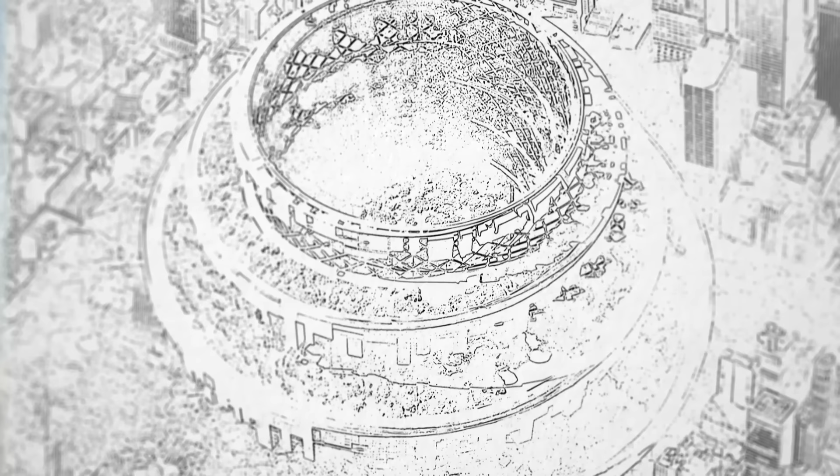Max Vitale, an architect from Berlin, has numerous visions of what the city of the future could look like. His designs have names like Babeltown. Instead of showing individual buildings, they show entire neighborhoods, parts of a city that appear lifted straight from the set of a science fiction movie.

That's how futuristic his designs seem to be. They ask what the city of the future might look like if we dispensed of conventional forms of mobility, like the car and the traditional elevator.

Some of these are provocative images that may look utopian at first glance, but there's nothing utopian about them. Babeltown was simply the idea of how the linear movement of a tram or a train could be turned into a spiral. The same goes for the village.

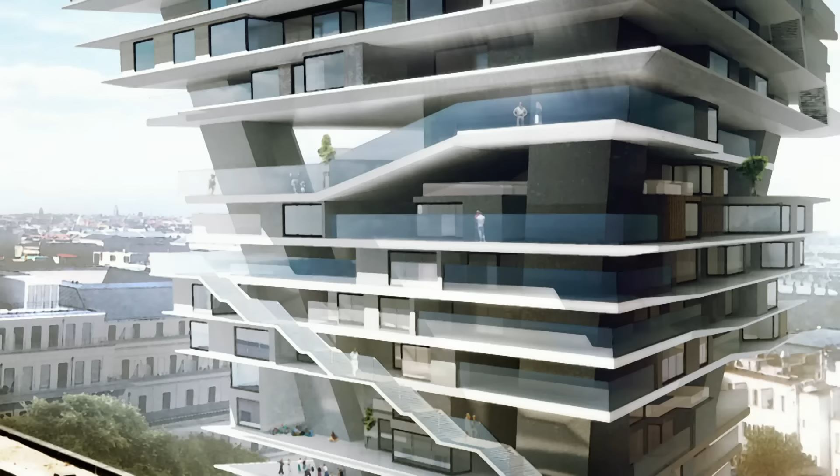The idea was to see what happens when we have a diagonal elevator, a zigzag movement. We wanted to show how the movement through the space is always the inspiration for the space itself, just as it is flat in a car city and vertical in an elevator city. That's exactly the same, only other mobility technologies serve as the input and inspiration for the design.

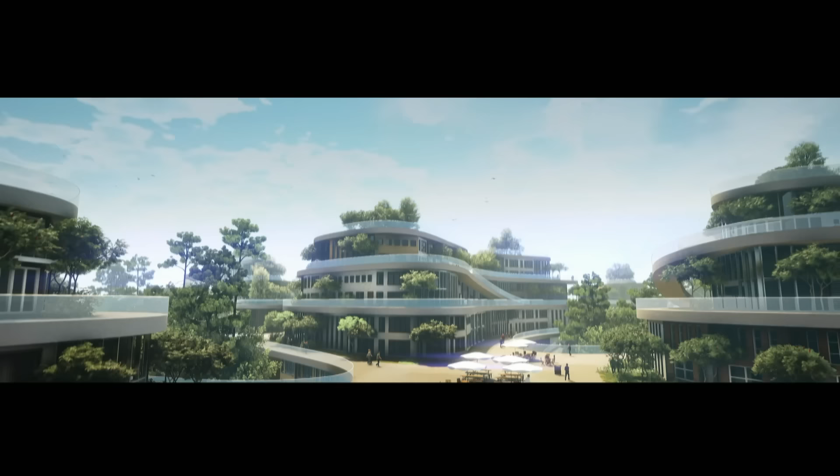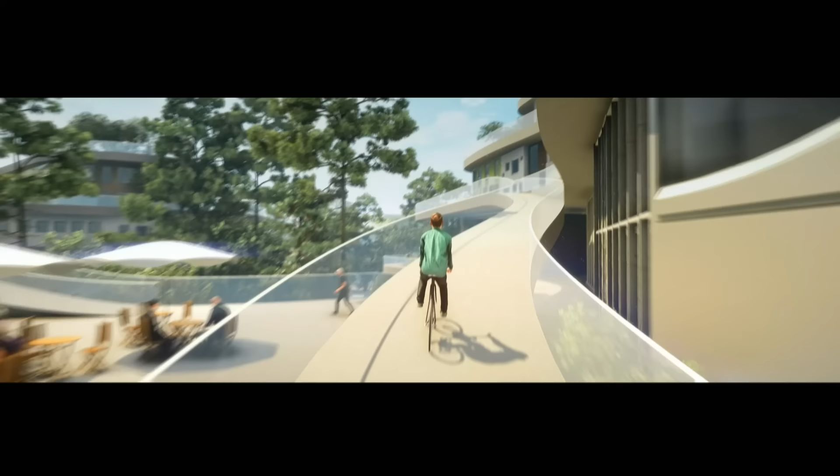Vitale's current concept was also based on this principle. He calls it the urban shelf. A neighborhood complex in which there are no cars taking up valuable space, but where people move from place to place with the help of so-called micro-mobility solutions, which are extremely flexible.

Instead of thinking in terms of finished architecture, we're focusing on the infrastructure that makes living together in a neighborhood possible in the first place. This starts with the basic structure and includes the floor, the ceiling, and the load-bearing structures, and the necessary infrastructure for water and electricity.

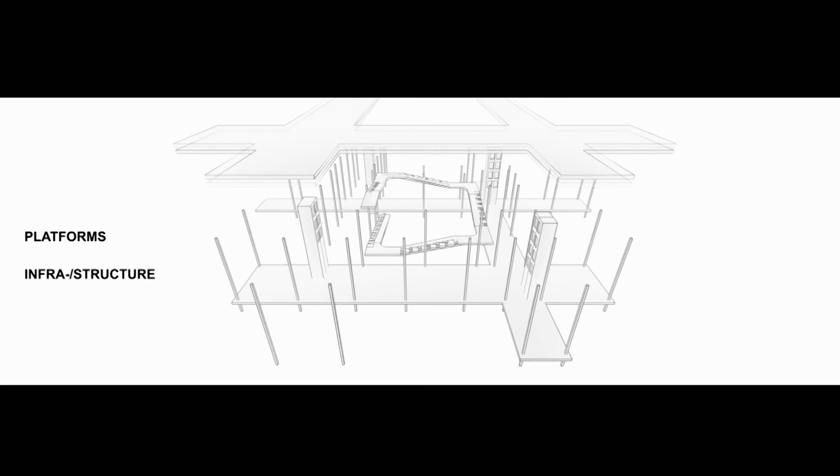Everything is built like a giant shelving system. Floors are stacked one on top of the other, with the shelves filled in between them. There are no individual buildings, but rather a single superordinate structure.

The idea is that these shelves will be connected with ramps for e-bikes, which can then easily ride up the hill, providing access to pergolas and public spaces that are found on the different stacked layers. And in between, there is room for living and working.

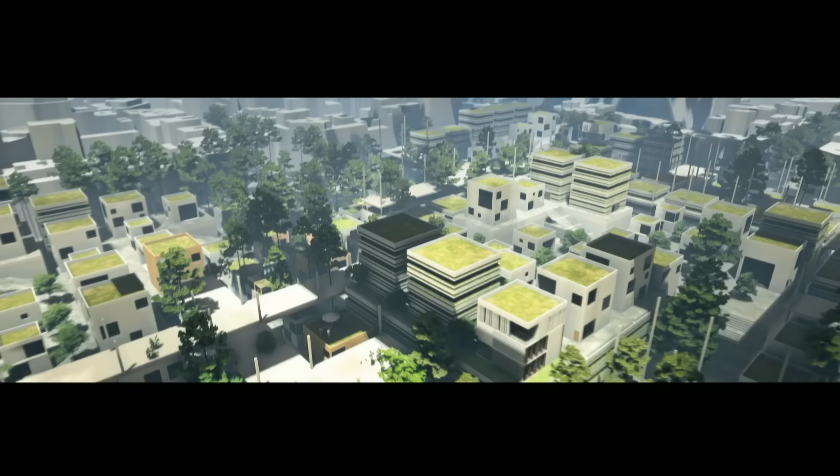That's the basic idea. It can be a very flexible way of building. It's not cast in concrete, so it can change over time. Material, function, size - what happens between the shelves is completely flexible. Only the basic structure is built to last forever. There are no high-rise residential towers here or multi-lane highways.

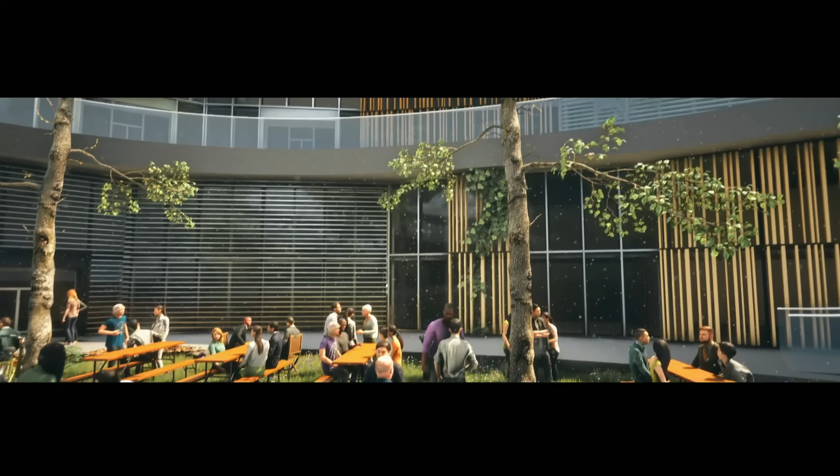As glib as it may sound, Vitale has created his design with people in mind. The urban shelf seeks to provide solutions to the densely populated city of the future, but aims to do so on a human scale. It creates meeting places that we otherwise lack in cities today, not just on one level, but on different levels. People can actually meet and interact on several different levels.

And that, we believe, is how we can and must ensure the social sustainability of a city of the future, through social exchange. We go to the city to meet and interact with others.

Tempelhofer Feld in Berlin, formerly home to one of the city's airports, is the largest open space in the German capital. This morning, Max Vitale has converted this space into an experimental laboratory. It is the first step in turning his design into reality.

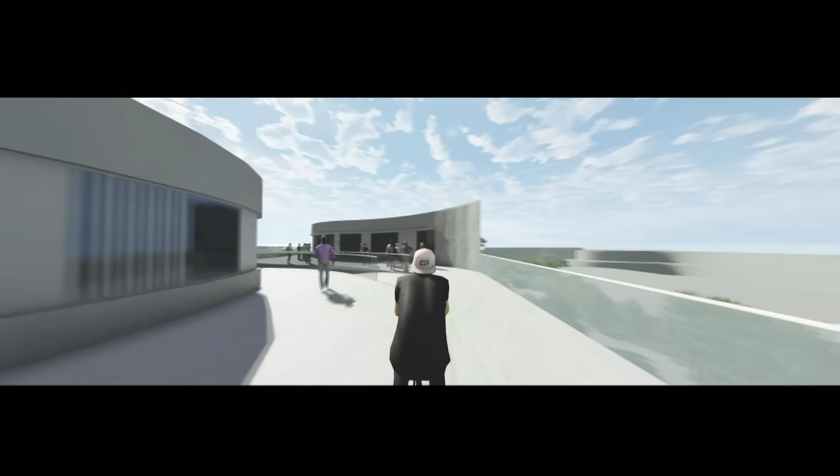Via an app, a virtual map is created that makes the urban shelf a livable experience. All that's required is enough space and the right vehicle. Max's colleagues provide support during his test drive.

Here you can see the path that you can follow. You can also see some neighborhoods or buildings that you can't drive through, but the key thing is the path, which is shown here in blue.

If we now project the virtual designs from the computer onto the surface, then we can literally experience them for ourselves by cycling through these neighborhoods and getting a sense of what it feels like.

Then we can see if the curves are a bit too tight or if it's too long and straight and therefore a bit boring. That way we can adjust and change the designs again after experiencing it out here in three dimensions.

Every day, Vitale sees how the need for alternative forms of urban mobility is becoming increasingly urgent. Parts of the heavily congested Leipziger Straße in Berlin have recently seen a speed limit imposed due to rising levels of air pollution.

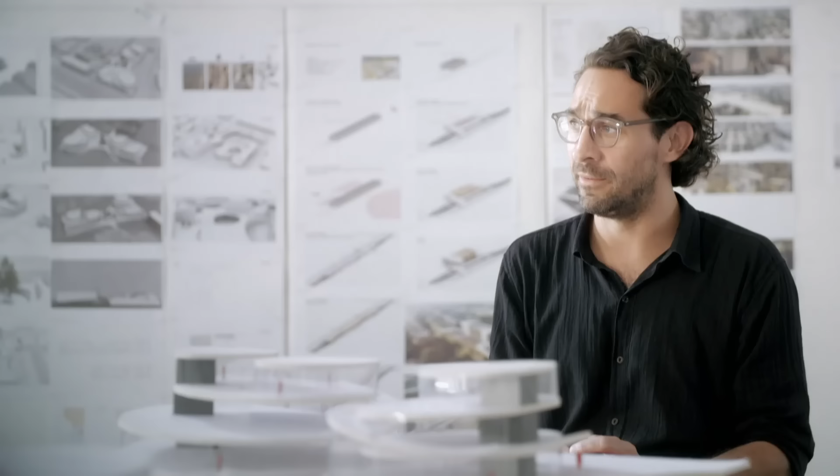Of course, we don't have the same traffic problems that we see in Mexico City or in India or in other developing regions and the megacities they have there. But even here you notice the fine dust pollution. So we have to ask ourselves, how can we get the cars out of the city? How can cities continue to grow? We also need more affordable living space. There's enough for us to focus on here in Europe.

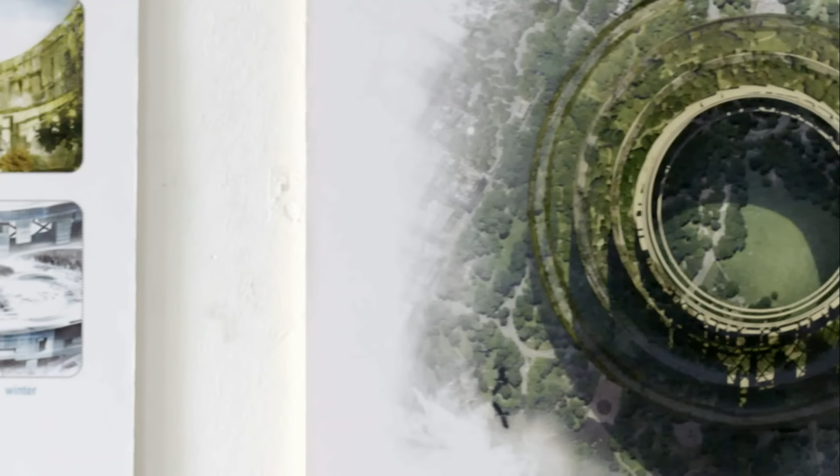Vitale's architecture studio often works together with companies from the mobility sector itself. These include car manufacturers and elevator builders, such as Audi and Schindler. The industry has long recognized that it can only remain sustainable by providing new solutions.

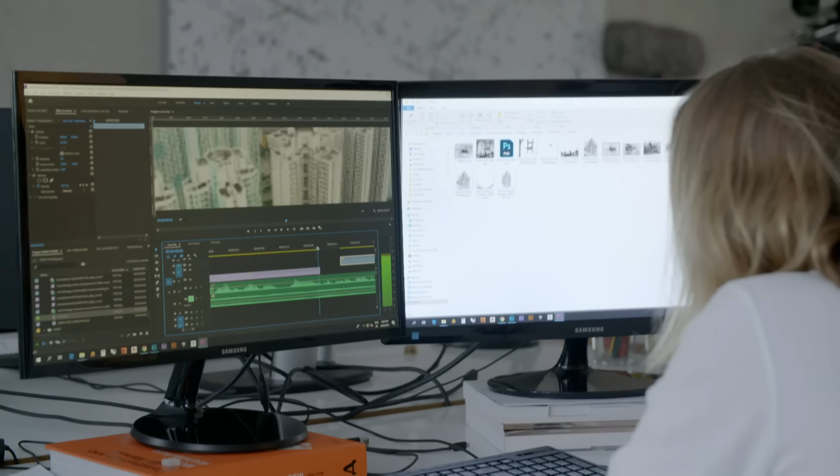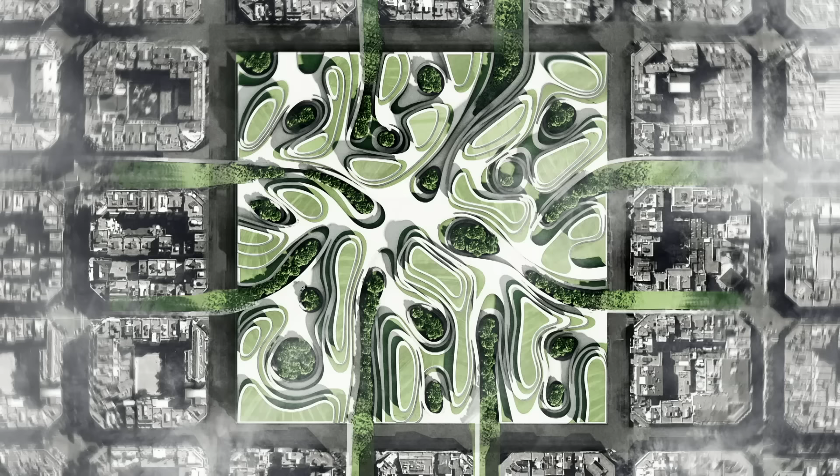For Vitale and his colleagues, the future of our cities depends on our willingness to rethink established structures. The urban shelf frees itself from the idea of architecture as a design spectacle and instead offers a system-based solution, one that is individually adaptable to any location, to any social structure.

The shelf contains space both for luxury apartments and affordable homes.

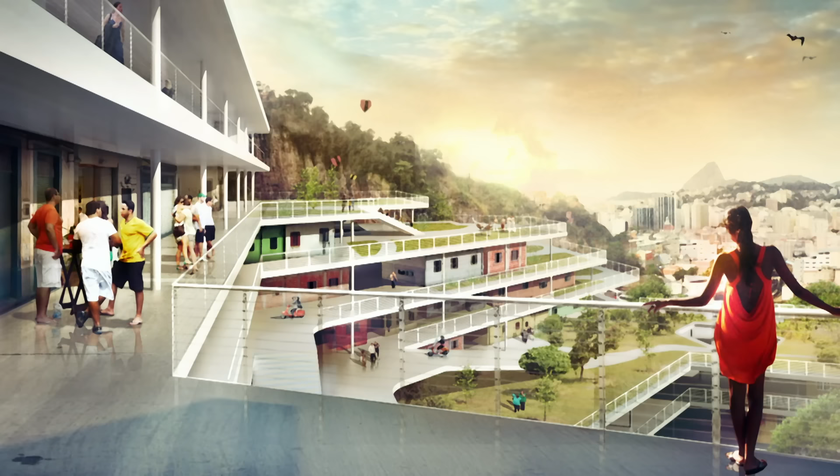We studied the idea together with students in Brazil and found that it would make sense to have the basic structure financed with public money to build the essential infrastructure, and then have the people living there build the living spaces within it, their neighborhood, with their own hands.

A bit like they do in the favelas already, but within the structure of the urban shelf. That's also what we were aiming for, a certain versatility and visual diversity in the appearance of these living spaces.

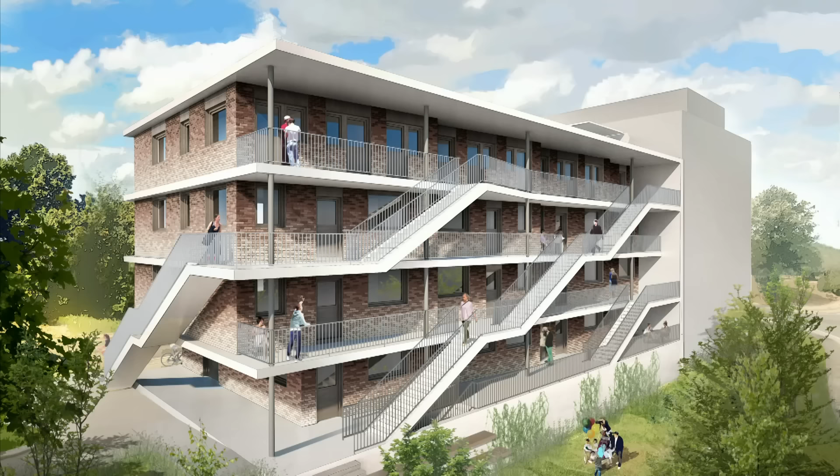In Tübingen, in southern Germany, this dream may soon become a reality. The first urban shelf has just been created here. While not yet a fully fledged urban neighborhood offering micro-mobility transportation options, it will nonetheless provide space for people to meet and socialize. Students and refugees are intended to live here.

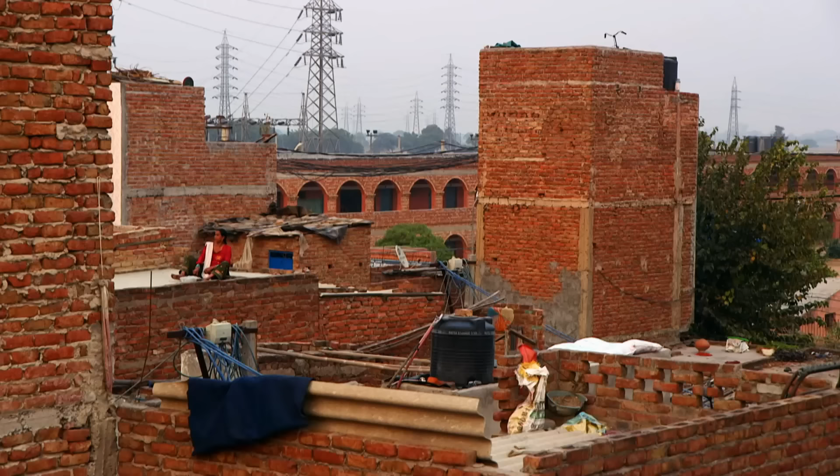How cities grapple with this is going to be a challenge, because cities are about people living together and working cooperatively. And if you can't live together in a city, you can't have a city. The system breaks down.

You don't have to travel to the developing world to see what this looks like. This problem has long been part of Western societies as well. A stone's throw away from Harvard University is the Massachusetts Institute of Technology, known as MIT. More than 11,000 people study at this elite university, but they can't live here.

While there are plenty of laboratories and offices available, there is nowhere for people to call home. The decision about land use is captured by international companies or real estate developers that want to maximize their returns. So as a result, in this neighborhood, we have no grocery store, there's no pharmacy, there's no daycare center except for MIT people, there's no healthcare facility. You would have to walk a long, long ways to be able to buy broccoli or a toothbrush.

And very few people live here. What little housing is here is only for rich people. So at night it's completely dead here because it's not really a functioning community.

It's not that urban planners don't care about these issues, but that they don't really have the tools to have an impact on them. Now, researchers at the MIT Media Lab are building these tools. The study group City Science is looking for ways to make towns and communities more livable for their inhabitants through the use of new technology.

Neighborhoods and entire cities can be simulated on one platform. What happens when new homes and offices are built? How does the flow of traffic change? How many inhabitants are too many? Which parts of the city are busy and at what times?

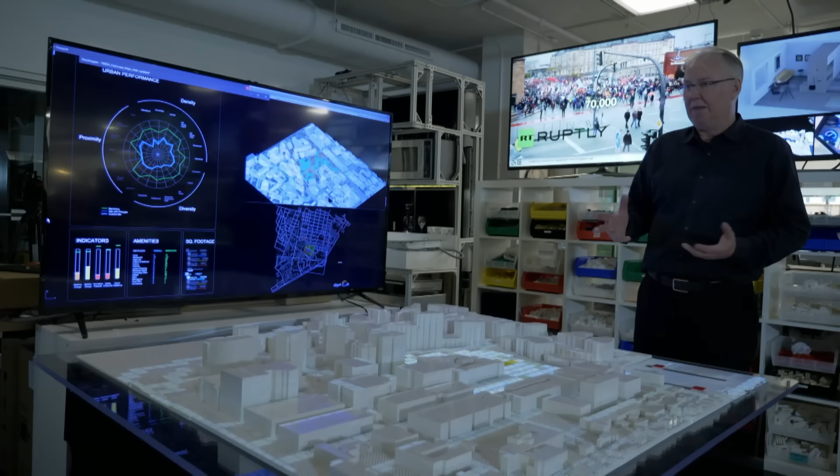This is Kendall Square, where MIT is. It's a one square kilometer district. MIT now has control of 14 acres, this area right here, and they are going to be developing this in the future. It's the last opportunity to turn Kendall Square into a real functioning community.

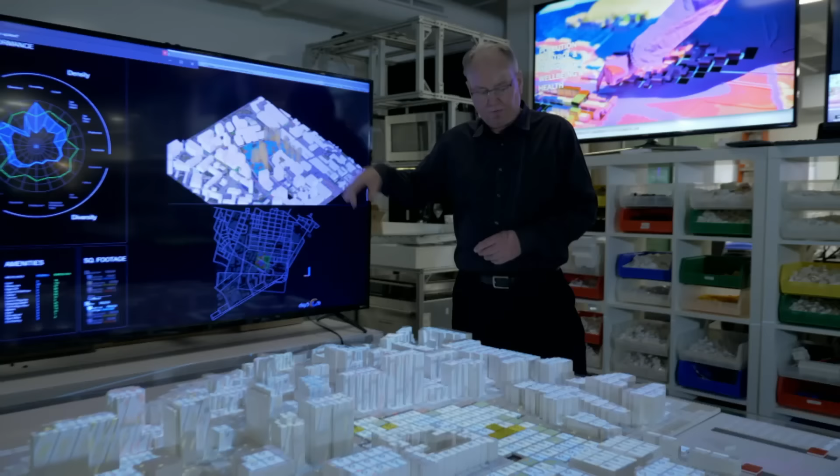So you can see most of the buildings here are represented by these codes. O is office and R is residential. So then when we run our simulations, we're taking into account the mix of people of different demographic profiles that might live or work in each of these locations, and we can change those on the fly.

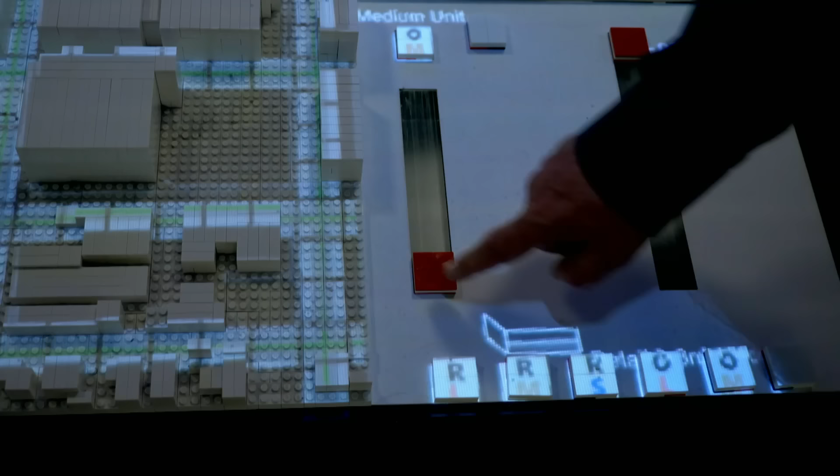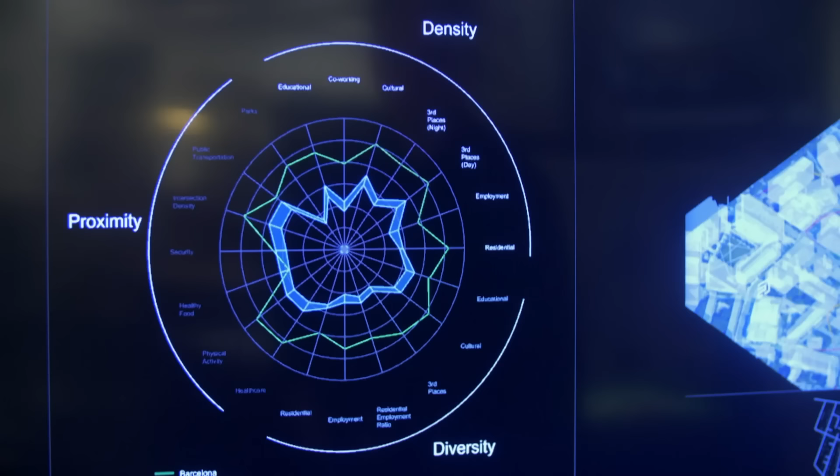The model has been fed with data sets that allow countless scenarios to be simulated and urban planning to be carried out in an interactive way. The idea is to be able to predict the consequences of planning decisions. The individual components of the model are like building blocks that can be exchanged, which has an effect on the entire neighborhood. Lego bricks are used to simulate the construction.

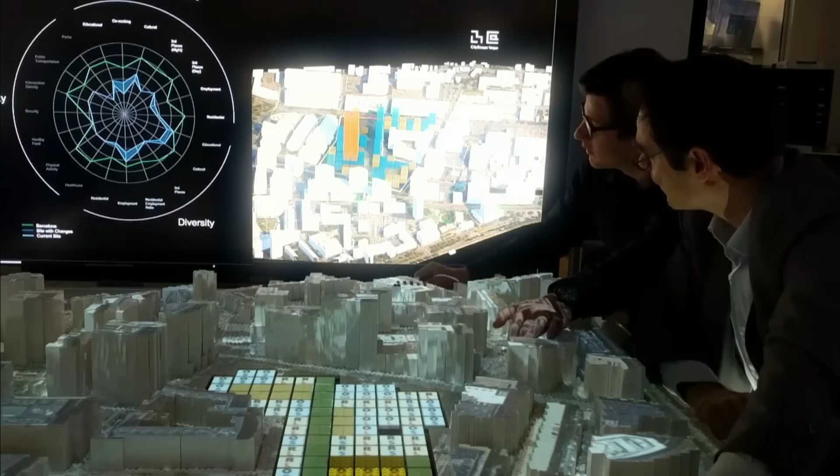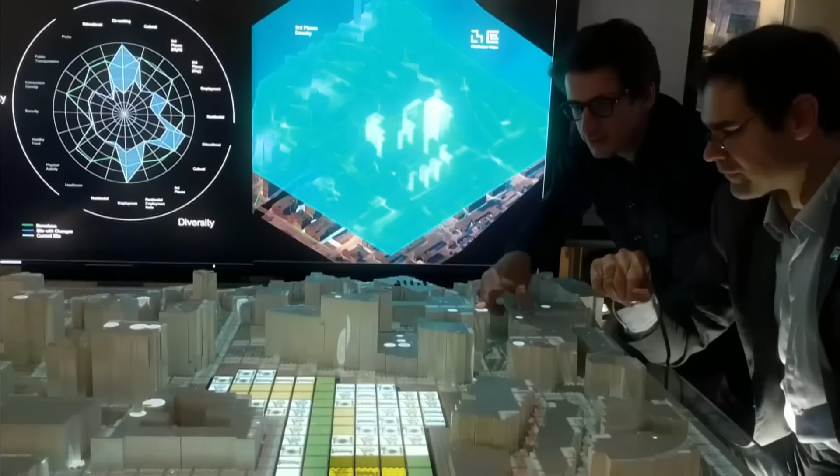With this kind of tool, you can have lay people who live and work in the community be involved in an interactive way in the process, and you can have the mayor, the staff, and civic leaders involved as well. We think of it as a democratization of design, putting very powerful tools that are currently only available to experts into the hands of non-experts to engage them in the process.

This dialogue between urban planners, investors, politicians, and citizens is an attempt to meet the needs of those who actually live in the city.

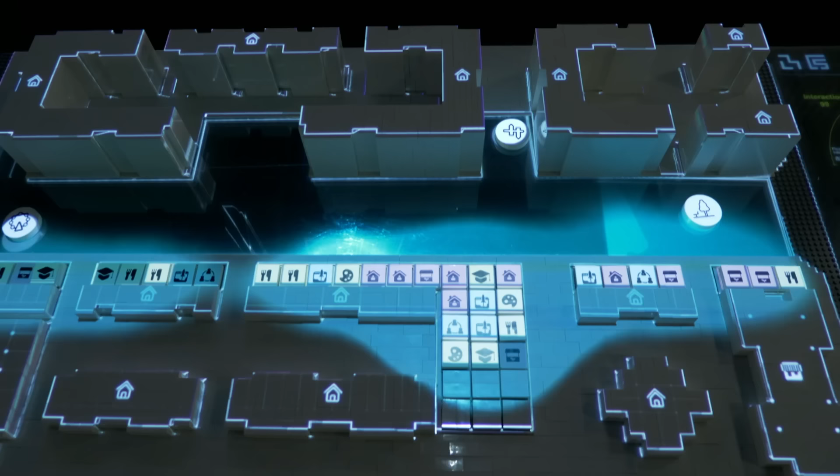The first projects are already underway. We're working in Hamburg, where we used a tool just like this to help address housing for refugees. We're working in Helsinki to help redesign the campus at Aalto University. This model over here is a street in Shanghai near Tongji University. Eventually we'd like to turn this into an open source platform that anybody could use. I'd like to see it in hundreds or thousands of cities all over the world.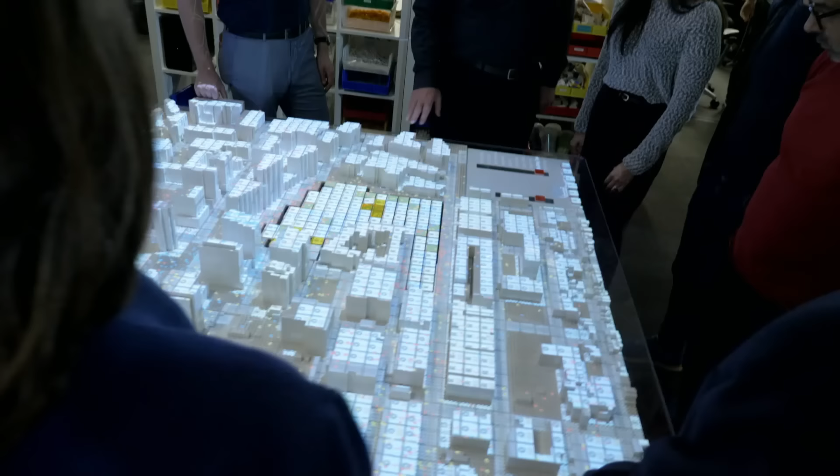You can move it up just a little bit more. This is office, this is residential, you can see the park. And in this case, we also had cameras in the street here.

It's really critical that urban design and urban planning become more agile, more adaptable in the future. The notion that you can create a master plan that gets passed by a city and stays valid for 10 or 20 years, when technology, economic systems, and social patterns are changing so rapidly, is just an invalid concept. The old ways will never be fast enough.

On its mission to improve city life, the City Science Group is interested in more than just urban planning. Another of their innovations, robotic interiors, was also developed at MIT. The scientists are working to answer a specific challenge: how flexible can a single room be?

Go back to Roman times, we still design the same way. The idea is that a space is basically for a single function: a bedroom with a bed where you sleep, a dining room with a dining table where you eat, a living room with a couch where you entertain. You end up with all these rooms, and as you begin to shrink the apartment—because there's no choice in the city, land is so expensive—you get to the point where you can't have single-function spaces. It's just impossible.

For years, the students have been working to develop a solution, even breathing new life into office furniture. Their initial prototypes already show that a single room can contain a whole lot of space.

By means of a light barrier and sensor, the living room turns into a bedroom, while the kitchen transforms into a bathroom. A dining table suddenly appears where a desk had been standing.

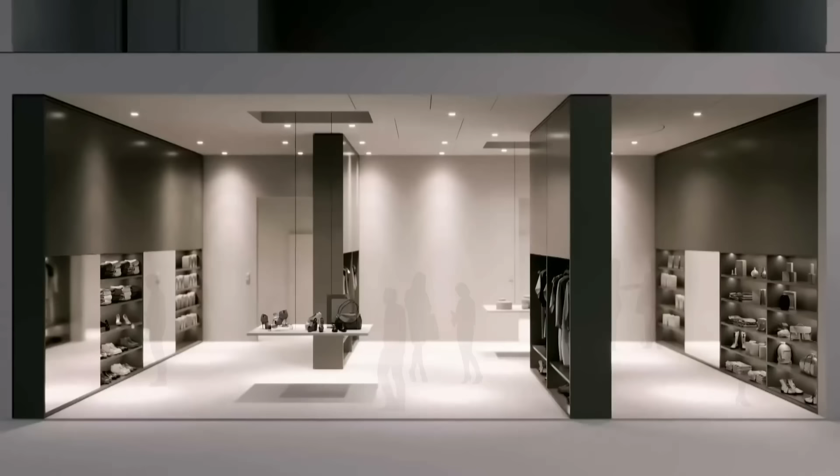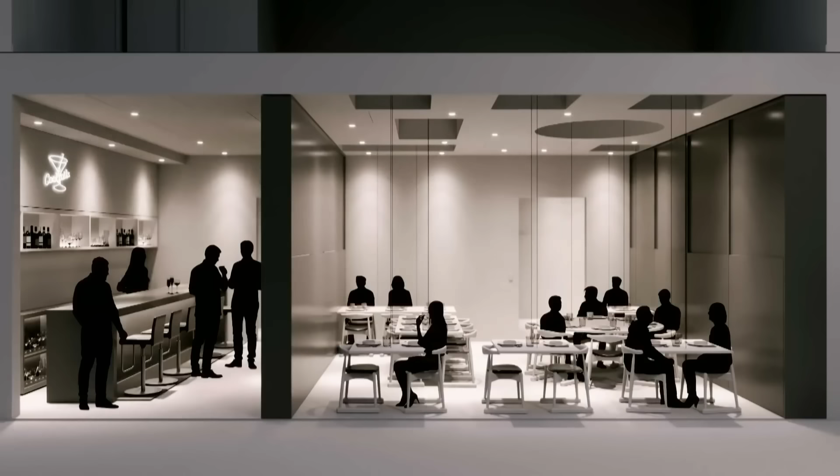And now the research project has turned into a commercial startup. It's called Ori Living, from origami, and it has already raised over $20 million in investment capital. The transformation and design of spaces with the appropriate technology allows you to configure the space effortlessly for whatever function is at hand. That's a very hard challenge, but we're beginning to make it work, and I think that is the future. I'm totally convinced that in 10, 15 years, every apartment in the city will have this.

Urban space is too valuable to be static. Innovations help us overcome the challenges we will face in the future. And yet, when it comes to building, we are still not innovative enough to ensure we will even have a future.

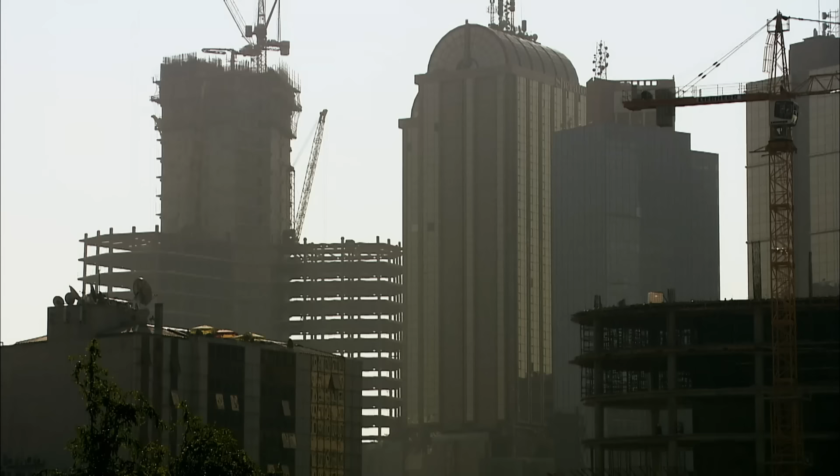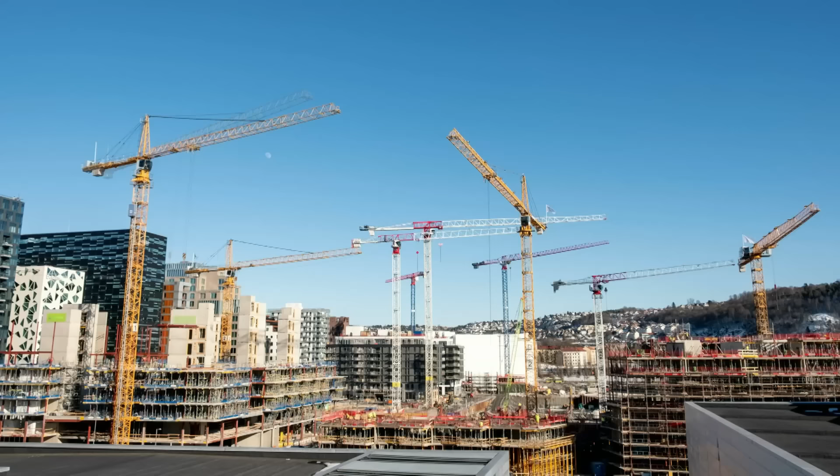The urbanization of our planet has led to an insatiable appetite for new buildings. Worldwide, 4 billion tons of cement are produced every year. The construction industry is therefore responsible for a significant proportion of greenhouse gas emissions and the use of precious raw materials.

We are running out of resources. As Buckminster Fuller said, we are on spaceship Earth—he wrote a book called 'Operating Manual for Spaceship Earth,' and what he meant is it's got finite resources. As Gandhi said, this planet is enough for our needs, but not for our greed. I think we've moved into becoming too greedy.

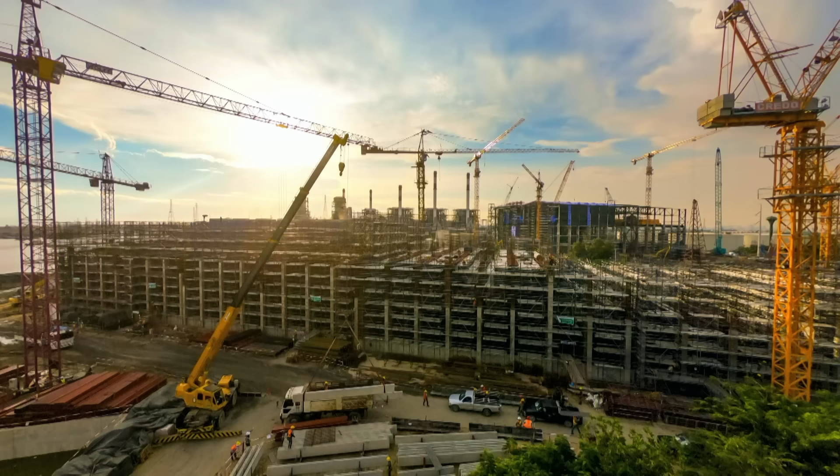There is such a demand for building materials around the world. For example, in China, more cement has been used in the past three years than in the USA in the last 100 years.

We are using our resources at a much faster rate than they can be replenished. The same goes for sand—we are consuming more sand than is produced through natural erosion. Sand is needed to make cement, which is why it is so precious for the construction industry. That it could ever run out is hard to imagine, since about one-sixth of the planet's land surface consists of sandy deserts. But this type of sand is unsuitable for construction.

To make cement, you need the kind of sand where the grains interlock and stick together. This does not take place with desert sand, so it cannot be used. That's why the city of Doha, for example, despite being located in the desert, has to be built with imported sand. Qatar imported $6 billion worth of sand into the desert last year.

The effects of this multi-billion dollar sand trade are disastrous. The need for building materials is so great that sand is being sourced illegally. Beaches are disappearing, and riverbeds are being dredged so much that their flow rate is changing, all so that newer and ever more ambitious building projects can be realized in the world's major cities.

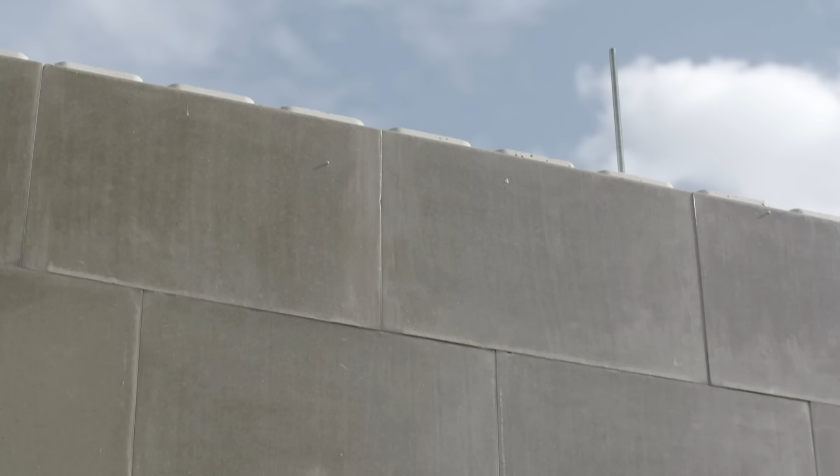In a small town in the German state of Thuringia, that is exactly what is happening. A new building material called polymer concrete has been created. These bricks could revolutionize the construction industry, as they are made largely of a raw material that has so far been unsuited to building: desert sand.

Gunther Plötner and Gerhard Dust are the inventors of this miracle substance. Together, they founded the company Polycare.

That seems to make quite a difference. Sand always contains dust particles, which are of no use to us. If I pour it like this, you can see the dust rising. We can't use this dust.

The past few years of research have made the two men something of sand experts. They know exactly which weight and size of grain are required for their specific purposes. Their time in the laboratory is spent perfecting the formula of their building material.

The sand is sucked into the machine, and a polyester resin, which is a liquid, comes out of a tap. The two are mixed together, and this mixture comes out at the front towards an outlet pipe. At the last moment, we add a hardening agent. It's a bit like baking a cake: you add the baking powder to the cake mixture, and the cake rises.

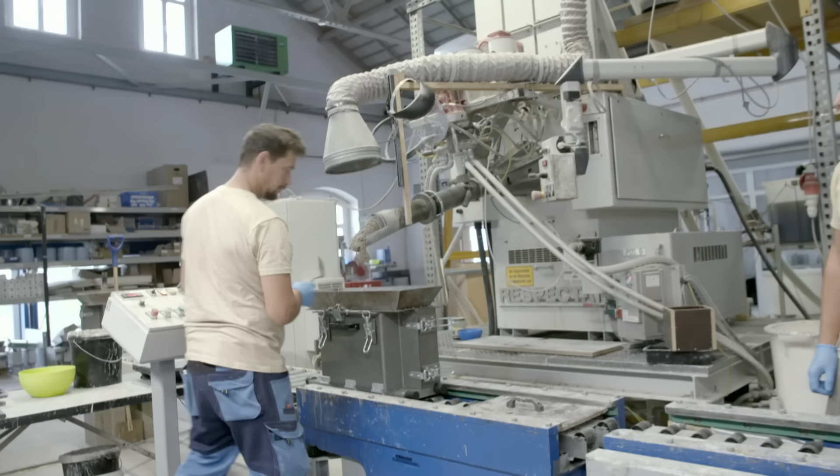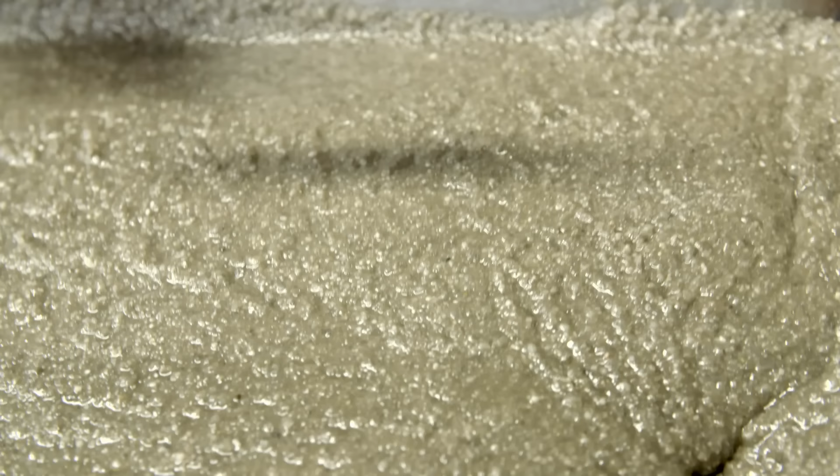The polyester resin that is added to the sand is a plastic, yet has properties similar to tree resin. This polyester resin moistens the sand and glues it together.

What's special about our polyester resin is that it consists of 38% recycled PET bottles. So basically, we're gluing desert sand together with recycled plastic bottles to form a building material that will essentially last forever. The great advantage of polymer concrete is that once it has been applied and becomes solid, it's completely non-absorbent and releases nothing into the environment.

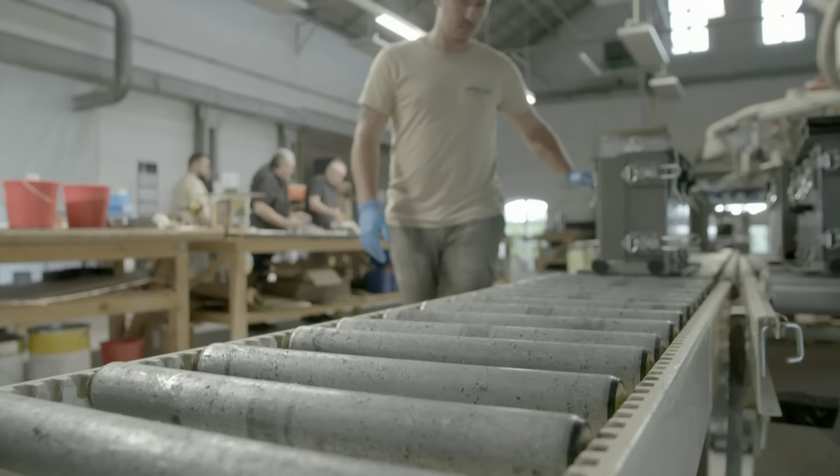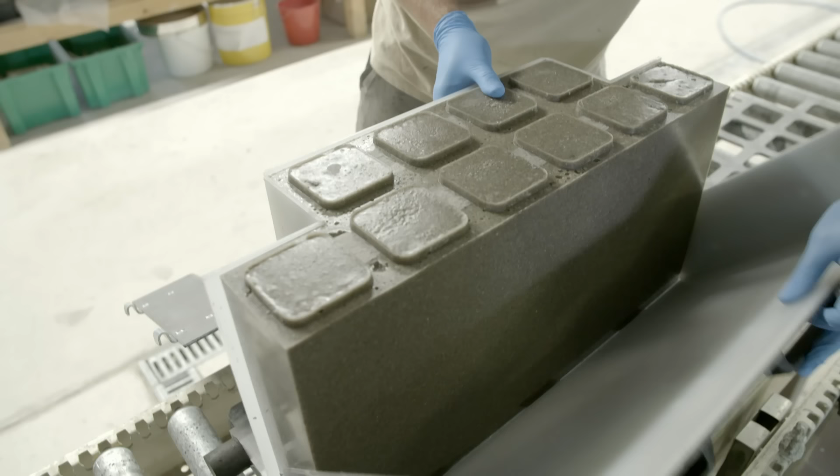It takes about 20 minutes for a brick made of polymer concrete to set. This is unbeatably fast compared to conventional concrete. And it has another clear advantage: the production process requires no water at all and generates significantly less CO2. The result is a Lego brick for adults that can be created quickly and, above all, easily.

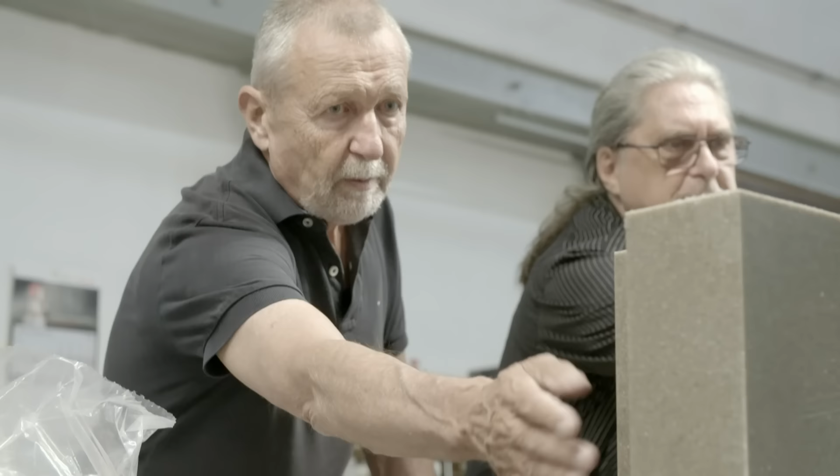The idea of producing a construction material came to us after a natural disaster, the terrible earthquake in Haiti in 2010. My colleague Gunther Plötner and I got together and thought about what we could do to empower people to rebuild the island themselves.

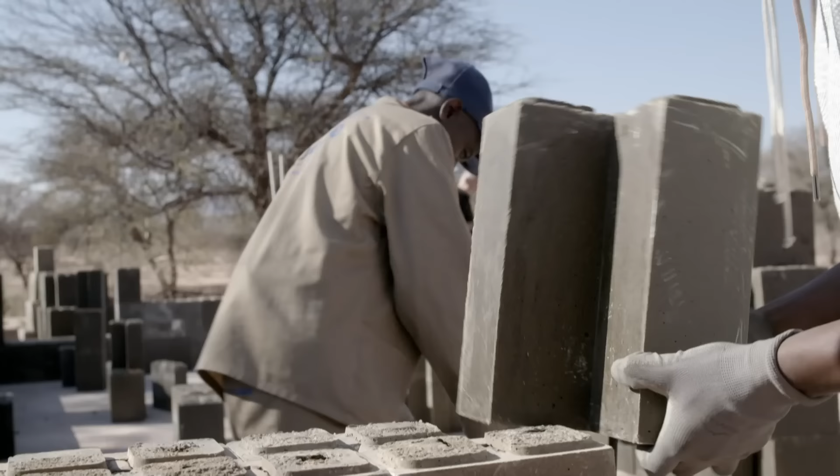In a small village in the middle of the Mount Etjo Nature Reserve, the latest construction site is located. Here, a church is to be built entirely from polymer concrete. Except for the site manager, the workers are unskilled because the construction itself does not require any specialist training.

These bricks have the same opening at the bottom as they do at the top, and that's why you can simply put one on top of the other and it fits.

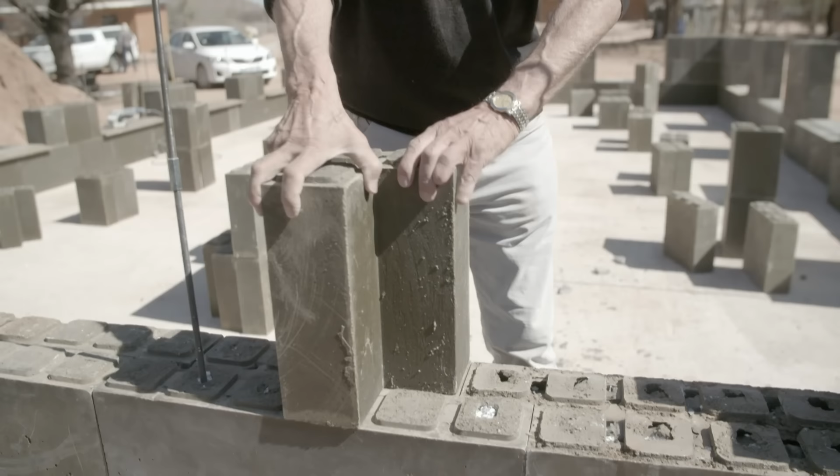All of us played with Lego when we were children. I think that's why the principle is easy to understand. If children can do it, why not grown-ups too?

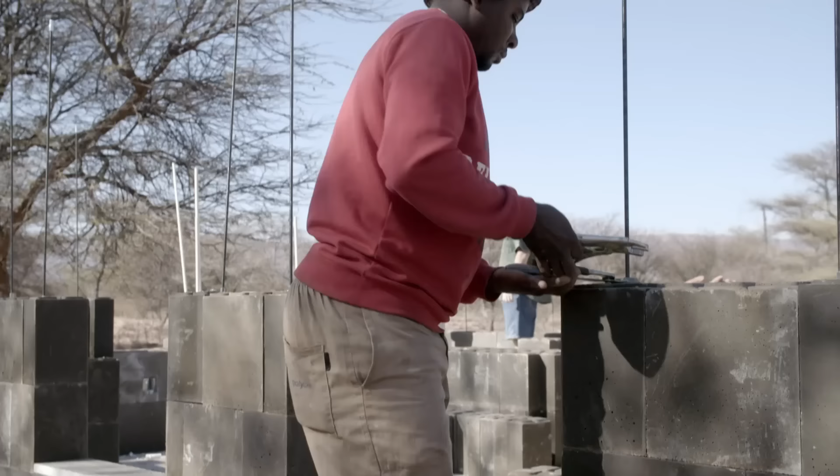The exact number of bricks that will be needed for a building is calculated in advance. This helps reduce the amount of construction waste. I believe this one is a little bit too high.

Not only that, the plug-in system requires neither mortar nor any other binding agents. To make sure the walls are completely stable, the bricks are also screwed together using these long threaded screws.

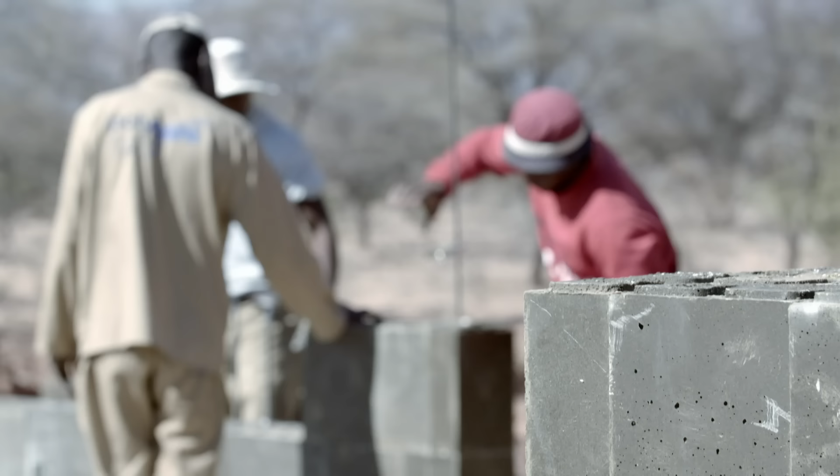In just 5 hours, the entire facade is almost finished.

Miriam Shikudula is the good soul of this project. Miriam tells us that the community is only getting a new church at all because of the donations of tourists from Germany and America. Their current church is merely a shipping container with door and windows.

It's very small and it's very hot. And when it is cold, it's very cold. There's many people, some stay outside, we open there, and some people stay outside there. I see the church is very important because if somebody gets sick or has any problem, they will come to church asking for prayer. Yeah, and you pray for them.

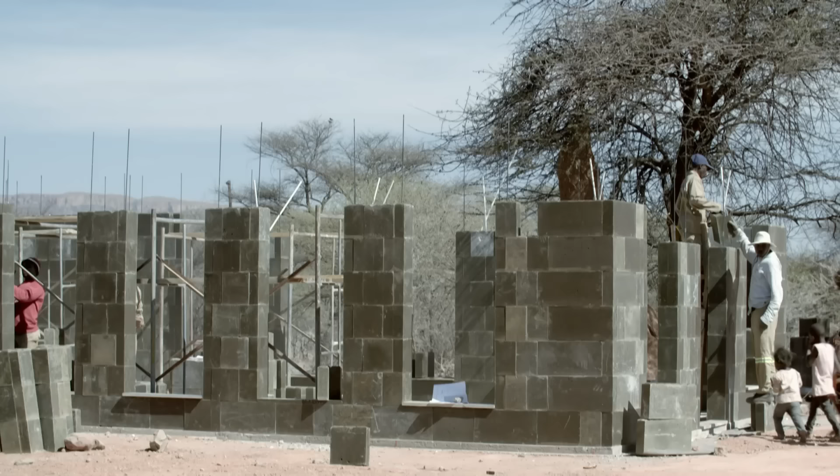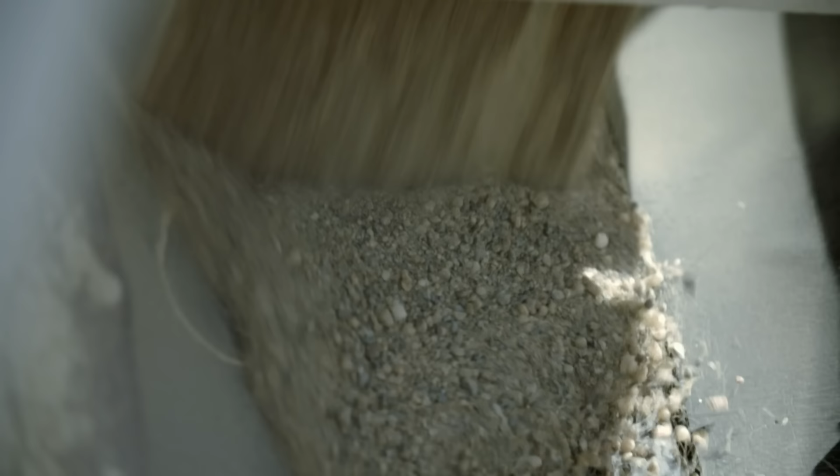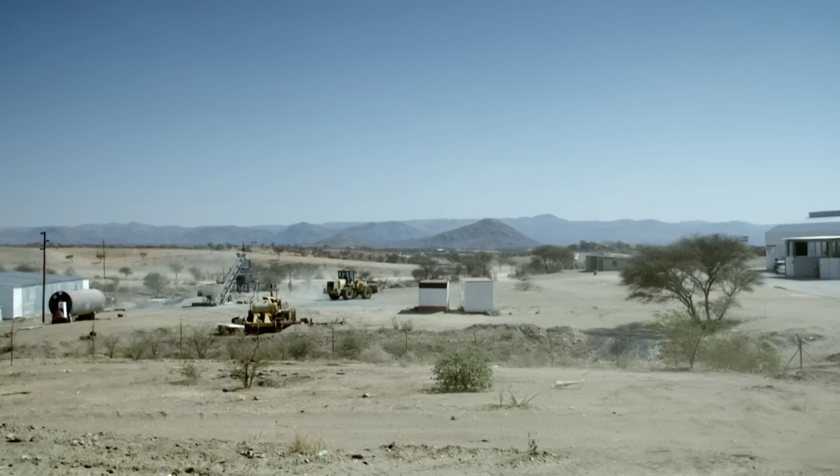A few hundred kilometers further south, near the capital Windhoek, a new supply of building materials is being produced. For the past few months, the first polymer concrete bricks made directly in Namibia have been created here.

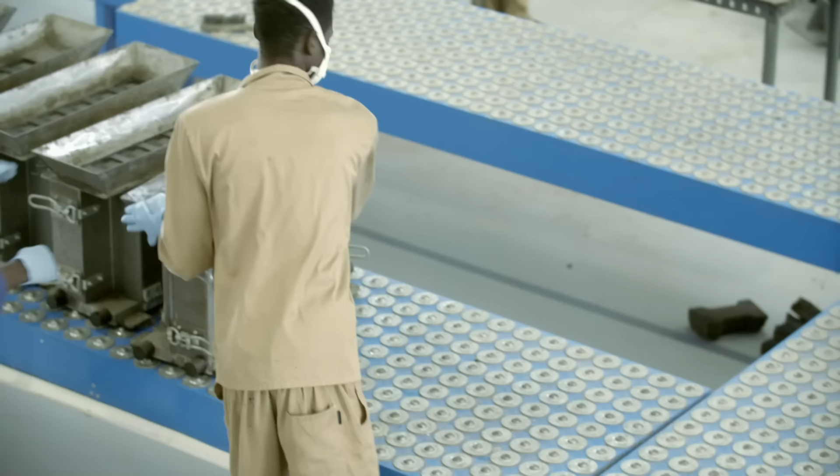This is Polycare Namibia, the first production facility outside Germany.

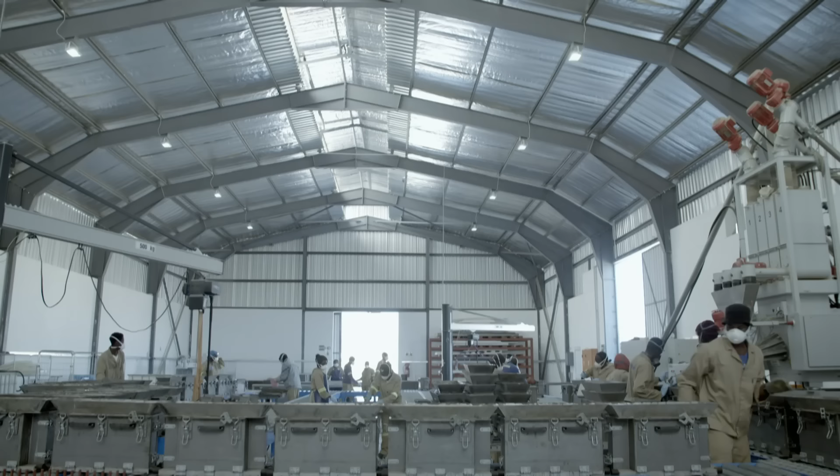We have a new team made up of 15 women and 15 men from the neighboring shantytown. We've been in production here since February and are producing enough materials for one new house every day.

Sand from Namibia is turned into bricks that look different from the ones we produce in Germany, simply because the sand is a bit different.

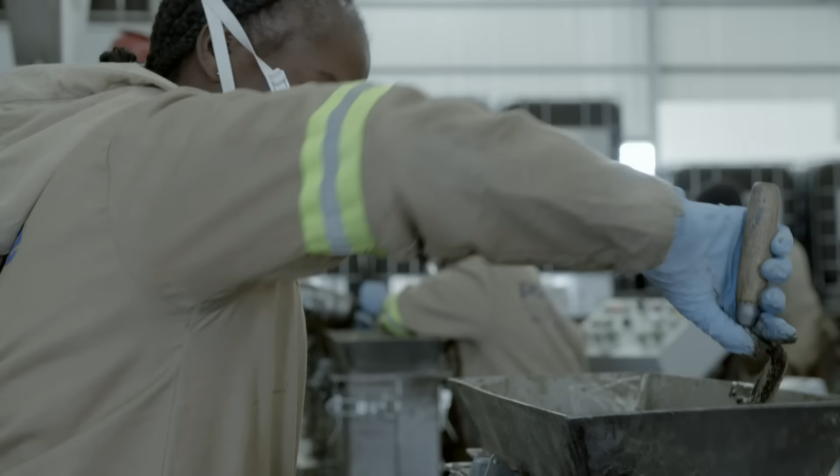We get to see the houses that are built here, how the people live in the houses, and how it changes their lives. We also see how the lives of our workers change. That's what's so great about it.

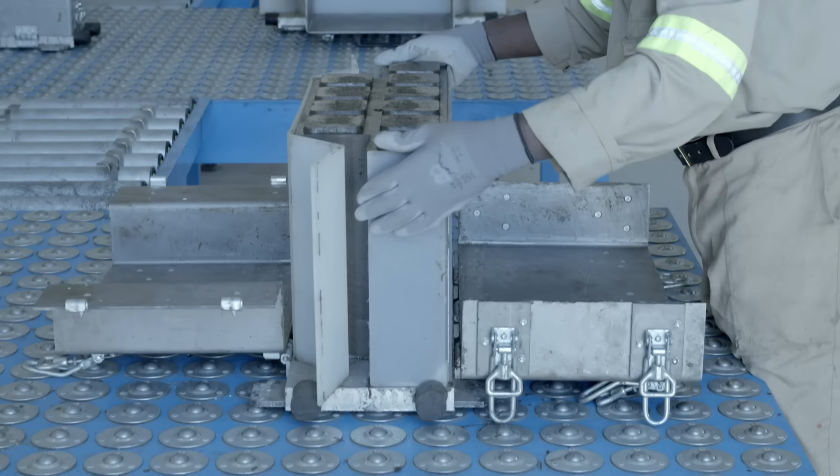The shanty towns on the outskirts of Windhoek. More than a third of the Namibian people is said to live in such makeshift settlements.

And yet, a house made by Polycare has already been built here. Previously a model house presented to the Namibian government, the company has since donated it to the Philip family.

Before that, their living conditions were quite different. It was small, we didn't have a kitchen like this. So we mostly used to do our cooking outside the house. When the rain comes, it goes straight inside. They destroy the TV, everything. It's not a good house.

Everyone is just dying to have a proper house. As you were coming, you could have seen on the road that most of the houses here are just made of iron, these iron houses. So they all want to have a proper house, a decent place to put their head, and a place where they can call home.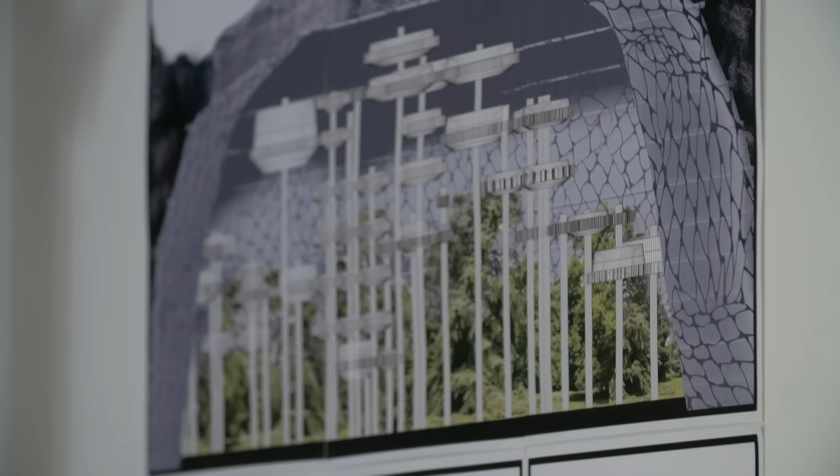In architecture, it's important to think about philosophy, politics, business, sociology, geology, geography. All of these disciplines play a role in what the architect has to do, and all these fields must come together to inspire the architect's designs.

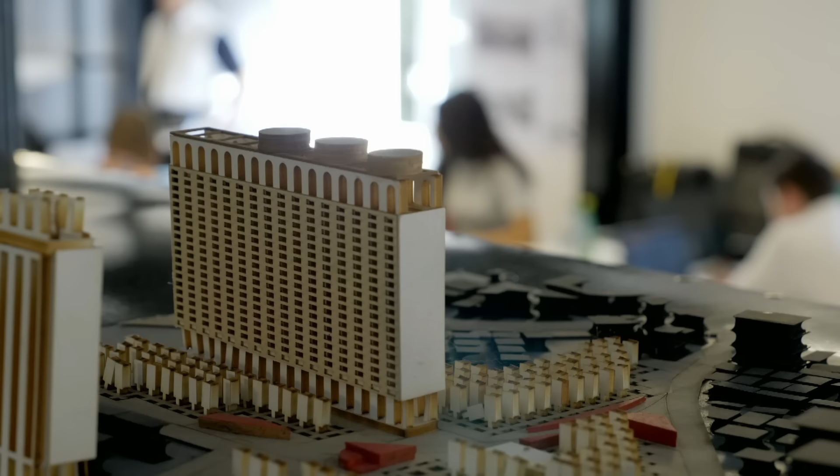Architecture is a culture that absorbs and transforms things to allow something new to emerge from them. Anyone who has studied architecture can design something, but the challenge lies in bringing all these disciplines together. And that's what we're focusing on here. After all, people who have studied architecture should be in a position to change the world.

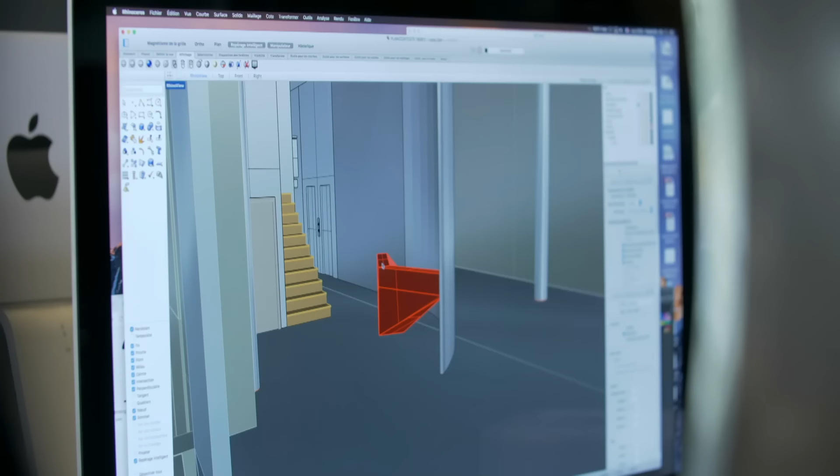Odile Decq has taught at various architecture schools and universities. But she often found the way architecture was taught too rigid, too conservative, too theoretical. So she decided to found her own school of architecture and pursue the questions that interested her. What is the role of the architect and of architecture today? And how can they solve the challenges of the future?

There are some architects who carry out data research. They take data sets and use them to analyze the location, the environment, or the city, and then determine what people, in effect, what the customer needs, without ever bothering to meet the people they are designing for and getting to know them. The human dimension has completely disappeared in architecture. That's actually what I regret the most. And that's why I think we need to bring the humanistic idea back into the training of architects.

When constructing a building, you have to deal with the person you are working and designing for. You have to understand their wishes, because their wishes are the basis of our work. Unfortunately, this is rarely talked about in architecture schools today.

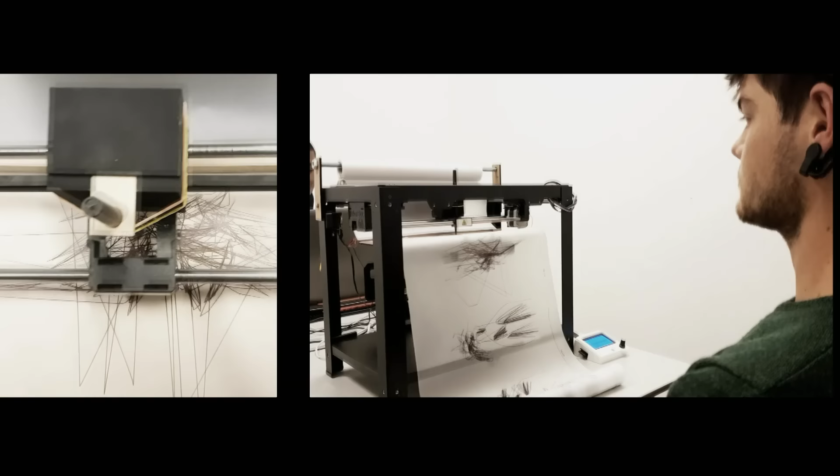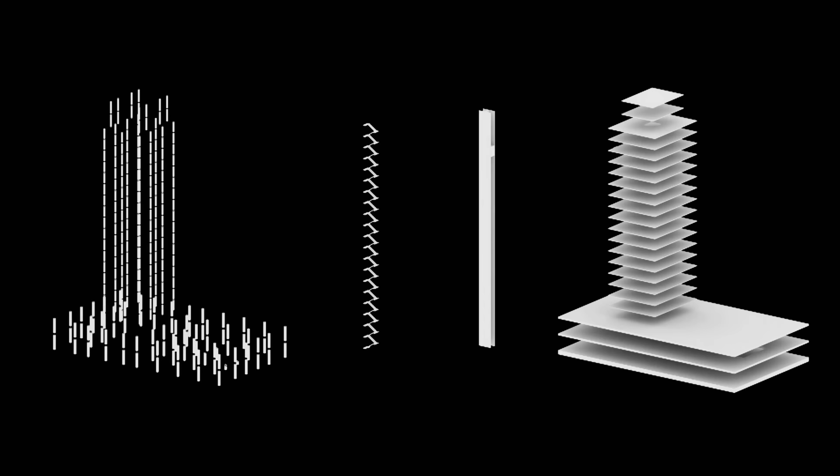How these wishes can be incorporated into architecture as directly as possible is the subject of Joséphine Borrat's master's thesis. Her concept allows the shape of a building to be determined by the brainwaves of its inhabitants. In Joséphine's thought experiment, the architecture even changes as the brainwaves change, thus reacting to the inhabitants' emotions and needs.

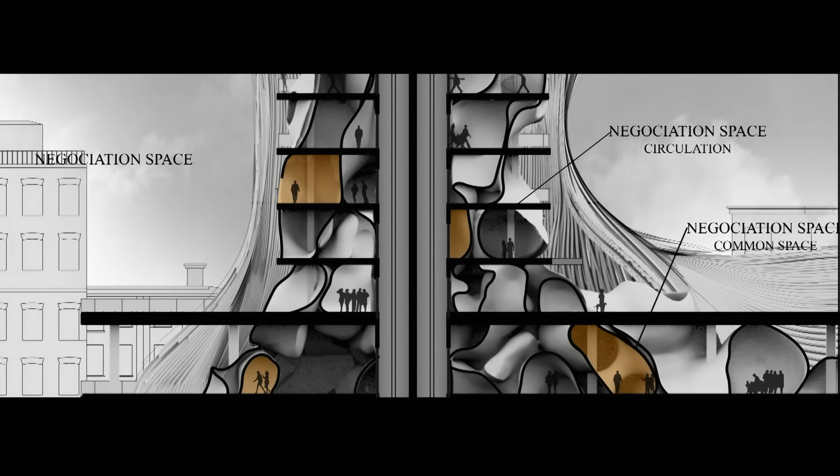The idea was to ask what would happen if the human body and architecture had some kind of common technological DNA. We are rethinking how we will build and live in buildings in the future.

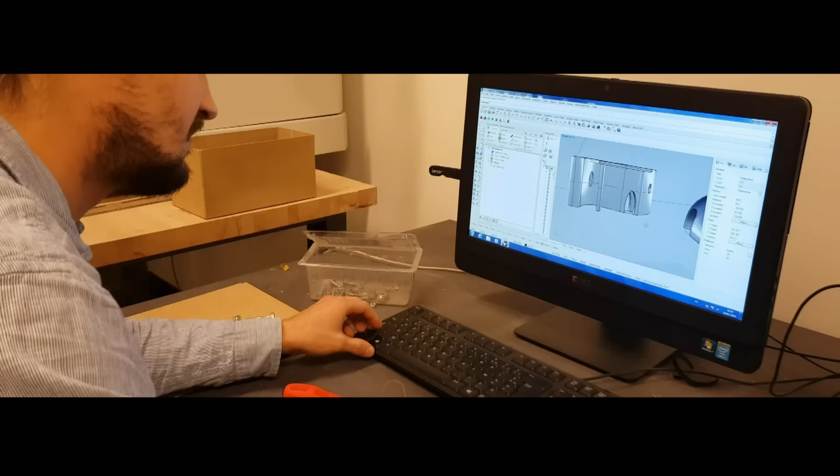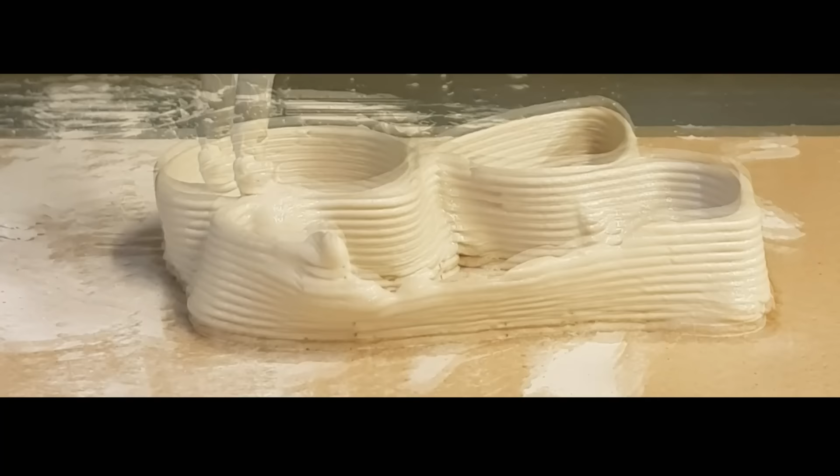Using a 3D printer, the geometric shapes created by the brainwaves are translated into real models. The principle works.

Nowadays, we can gather brainwaves and transcribe them into geometry. Of course, we're not able to interpret brainwaves and to say what someone is thinking or feeling at any given moment. But we can collect clues about a person's sensations, feelings, or impressions.

The idea of this project was to question our future role as architects. It's about bringing together a range of disciplines and realizing projects that touch not only on one aspect, but on several aspects of a field, from neuroscience to urban planning.

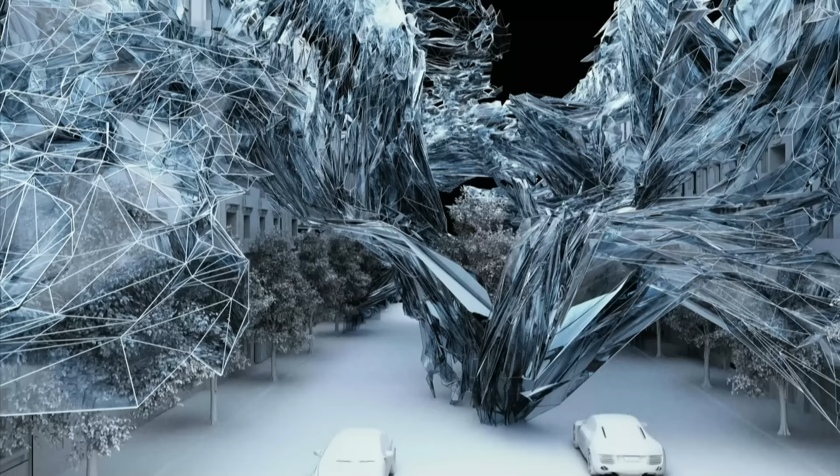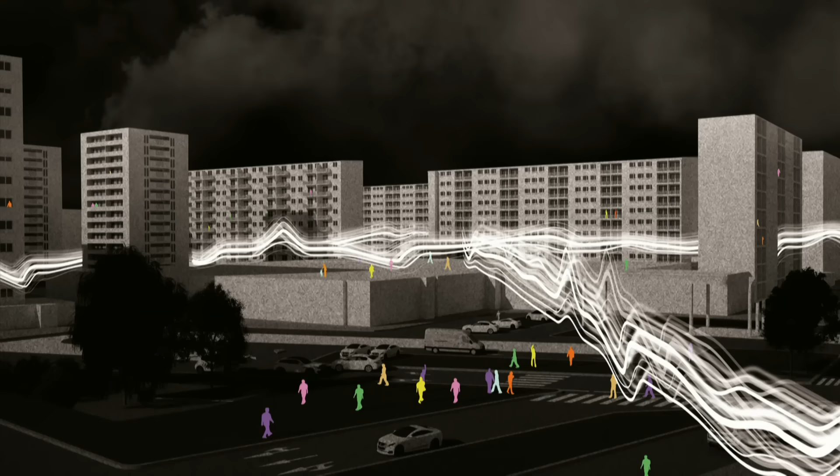The students' designs could sometimes be mistaken for modern art. The young architects experiment, dream, find unusual perspectives. Often it seems less about the feasibility of a design than about the idea behind it. What would it be like to live on the moon?

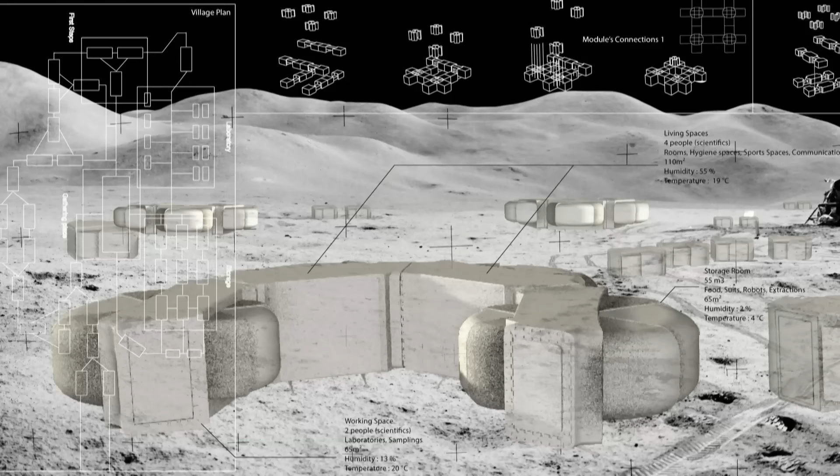If our profession only requires us to follow rules and design buildings that comply with the regulations of the day, then the job of an architect will eventually disappear. If architects, or as I prefer to say, people who studied architecture, because not everyone necessarily ends up becoming an architect, have a vision of the world, a viewpoint, and are able not only to do their job, but also to imagine the future, then architecture will continue to play a role in the world.

We must start thinking about tomorrow, today, and act now for the sake of our future. When I teach, I always tell my students how much I envy them, because they belong to a generation that is about to reinvent architecture for the next 100 years. Isn't that fantastic?

Designing how space will be used in the future has never been more important. It's a daunting task because so much is at stake. How and where we will live together in the future will not only be decided by architects, urban planners, and engineers, but they can play their part in ensuring that this where and how will continue to exist at all.